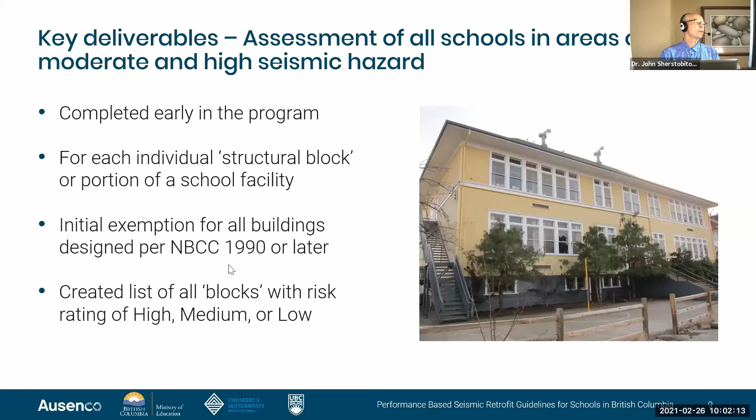Another key deliverable at the beginning of the program was to assess every school in British Columbia in moderate and high seismic hazard regions. Every piece of the school was broken into structural blocks because schools here in BC have been added on year after year, and each one had a different structural behavior. Initially, all buildings designed 1990 or later were exempt because studies show they met minimum life safety. A list of all the structural blocks in BC was created with a risk rating: high, medium, or low.

Another key deliverable of the program was a custom database. Every school district, every school, every block had all the studies that were developed for them, and this was available to all the engineers to use, to look at what was done in other school districts, other buildings, what had been done in the past. It was a great database for the ministry just to record where the program was.

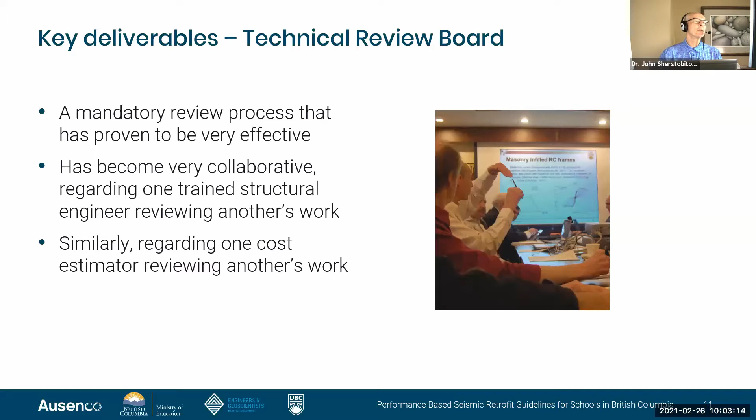Another key deliverable that was very successful was a technical review board. Every study was reviewed independently by another structural engineer. Every cost estimate was reviewed by another cost estimator, and it proved to be very collaborative. The engineers work, reviewing each other's work. It proved to be very collaborative to make sure the program was implemented as the Ministry of Education expected.

So the policy that the ministry put forth to the school districts: every high-risk building had to have this seismic project identification report done. What the ministry wanted and realized, there was a standard template. The fees for every consultant were uniform, so it was not about bidding low to get the work. Everybody had the same fees.

It was led by structural engineers, and at the end of the day, a concept and a cost was prepared for a standalone seismic upgrade, including input from the architectural, mechanical, and electrical disciplines to make sure all the removal and reinstatement of those components was included in the cost. And as I said, the technical review board reviewed the structural aspects and the cost aspects.

Following that, a project definition report was prepared to send to the ministry to obtain funding for the seismic mitigation of the school or replacement. At this level, this report looked at the options for an individual school: is it more cost effective to replace it, do a standalone seismic upgrade, or some combination of these? This now included all the costs for phasing, accommodation, moving costs, and maybe requirements from the local authority having jurisdiction such as sprinklers or universal accessibility. All of this was now the true, complete project cost for the ministry to provide funding to the district to implement this project.

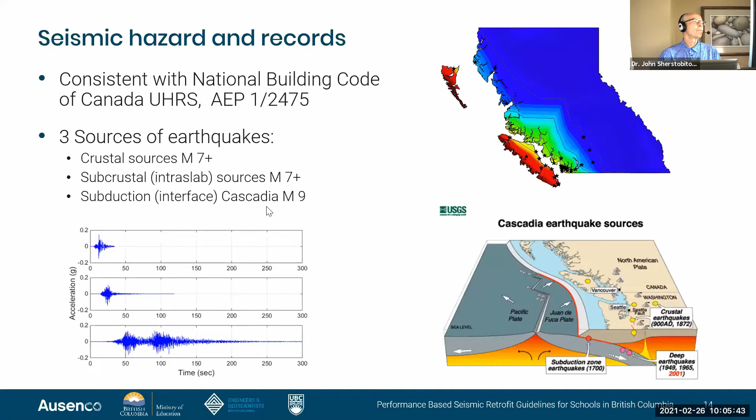So here's how the analysis was done. For each of the 3 earthquake sources, 20 ground motion records were selected, scaled to both high and moderate seismicity levels, and scaled to a conditional mean spectra at either 1 second or 0.5 seconds. At the end of the day, for each prototype selected for the studies, 240 ground motion records were analyzed to assess the behavior of each prototype in the system.

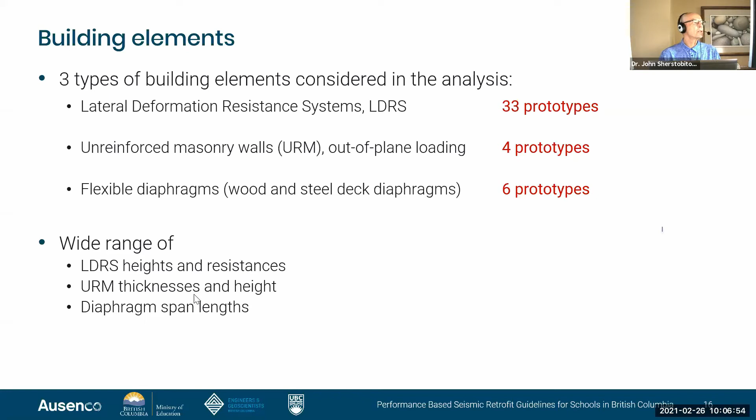The prototypes included lateral deformation resistance systems such as shear walls and bracing, with 33 unique prototypes consistent with existing and new construction in BC. This included unreinforced masonry walls that could collapse out of plane, flexible diaphragms of wood and steel deck typical for what we use here, and a wide range of heights, resistances, and URM thicknesses assessed as part of these analyses.

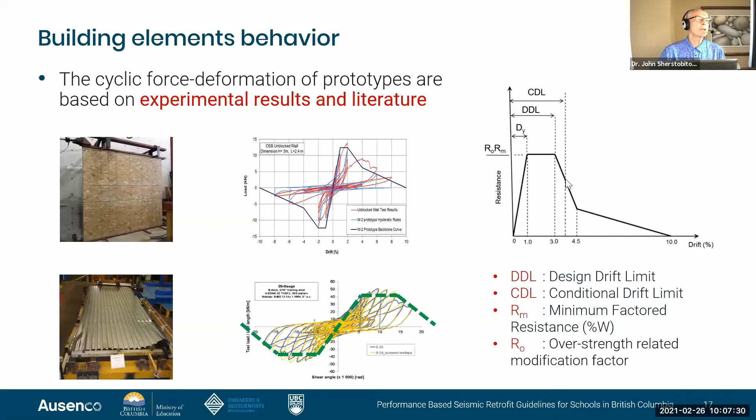For each prototype, such as the lateral deformation system prototypes or diaphragms, backbone curves were developed either from experimental data or from literature, including the strength degradation of each prototype. At the end of the day, a design drift limit was specified to achieve life safety, and a conditional drift limit was set to achieve collapse prevention for each of these components. This is just a snapshot of the variety of wood, steel, concrete, masonry, and clay brick prototypes assessed in the program, and the kind of maximum drifts allowed in the study for life safety performance.

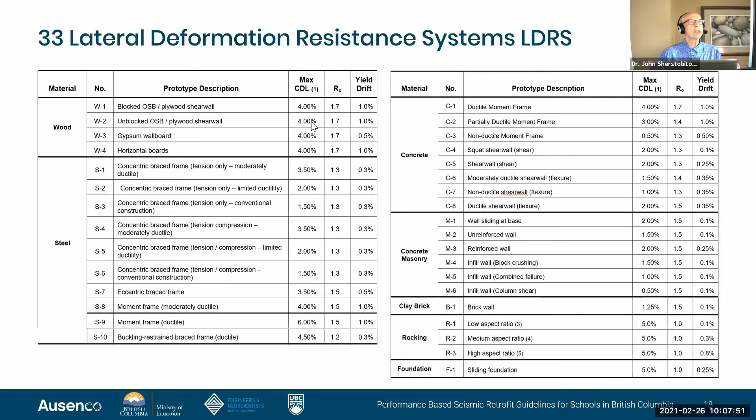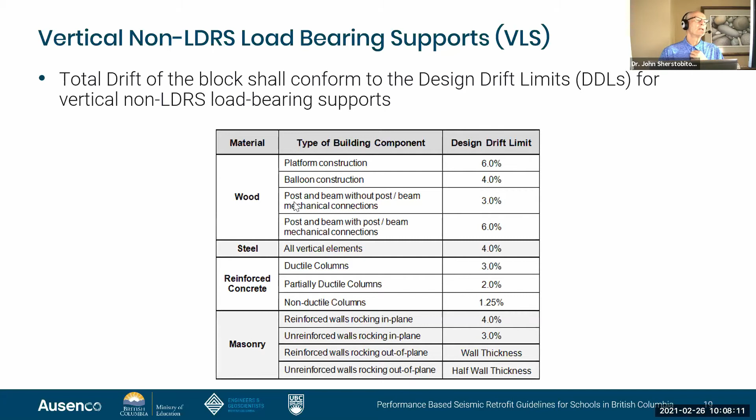Of course, the key in every seismic upgrade is to make sure that the vertical load carrying components remain able to carry the vertical loads. These are the drift limits for the various types of components to ensure they could carry the vertical load in the event of an earthquake.

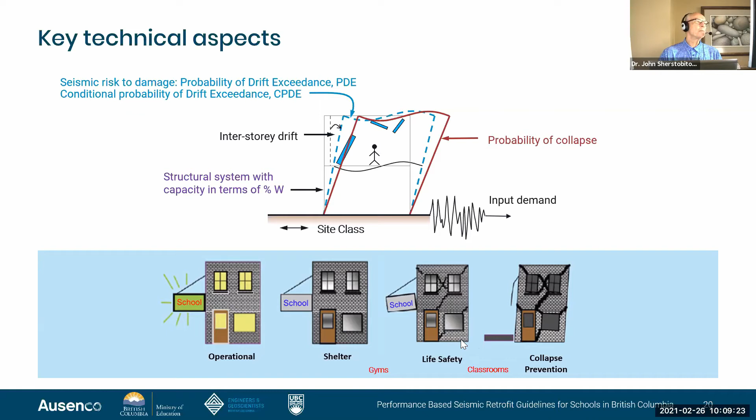For gyms, we expected a better performance to enable shelter in place after the 1 in 2475 earthquake, while classrooms generally required a minimum of life safety. For all the buildings assessed, this probability of drift exceedance of 2% in 50 years was deemed low risk, with various categories of medium and high risk also defined. The program right now is upgrading everything estimated as high risk to bring it down to low risk.

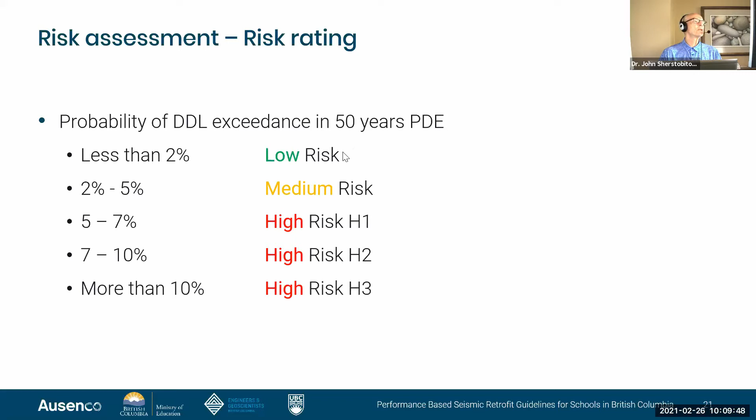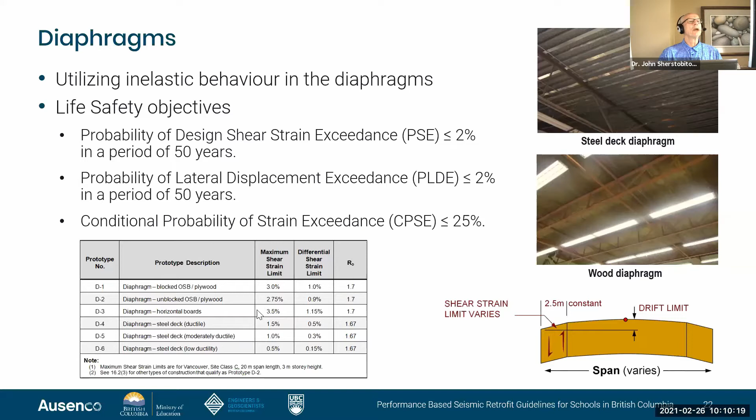Similarly to the lateral deformation system, the diaphragms were all analyzed for inelastic behavior to get the maximum capacity out of this inelastic behavior, again looking at probabilities of strain exceedance or displacement, either a probability or a conditional probability. The various diaphragms assessed are shown below here, covering all those analyses I mentioned.

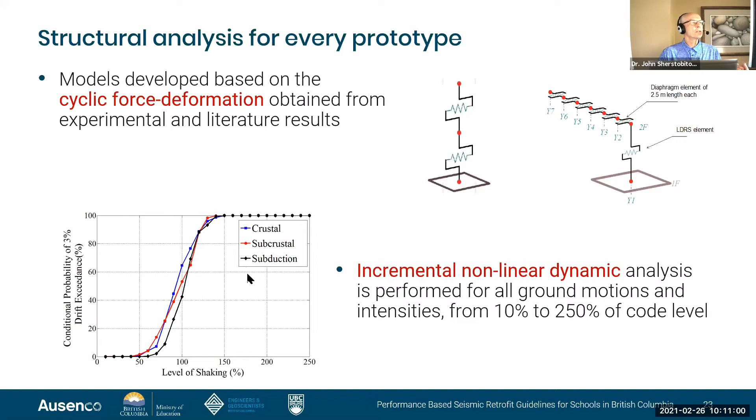So what did this analysis entail? Those nonlinear backbone curves, the nonlinear degradation performance of all the prototypes previously mentioned, were analyzed both as lateral deformation systems and as diaphragms. Incremental nonlinear dynamic analysis was performed from 10% to 250% of that code level earthquake to get these curves for each of the 3 types of earthquakes, moving into the probabilistic combination, ultimately to get a probability of drift exceedance in 50 years versus the factored resistance needed for that particular component. Everything was a probabilistic approach to be consistent with the probabilistic approach of the National Building Code.

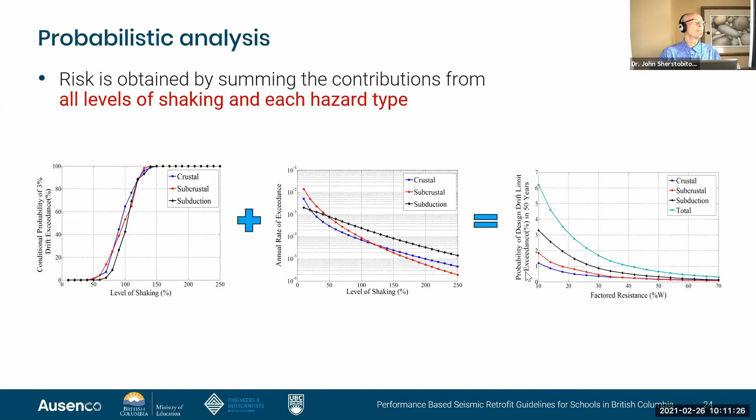As I mentioned, the fundamental goal was a life safety performance objective: a probability of drift exceedance of 2%, meaning the probability that this drift over the 50-year lifespan of the building would not be exceeded for all the kinds of earthquakes we can see in British Columbia.

In addition, there was a conditional probability check for just the 100% earthquake level: 60 earthquake records run for that level, with a probability of drift exceedance of 25% as the strength degraded. So a little further performance, but still far from collapse and collapse prevention.

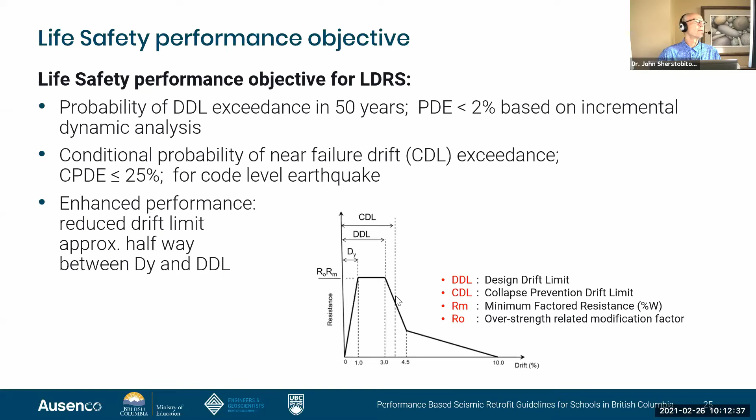So the seismic analyzer, I'll talk more about it. This was just a tool to access all these pre-analyzed nonlinear dynamic analyses. It's used to perform risk assessment and obtain retrofit resistance for drifts that would provide that life safety performance level. I'll speak more about this shortly.

One key aspect of this, we call it a toolbox approach, is that the intent is to use all the capacity of the existing components in the school and only add new components as necessary.

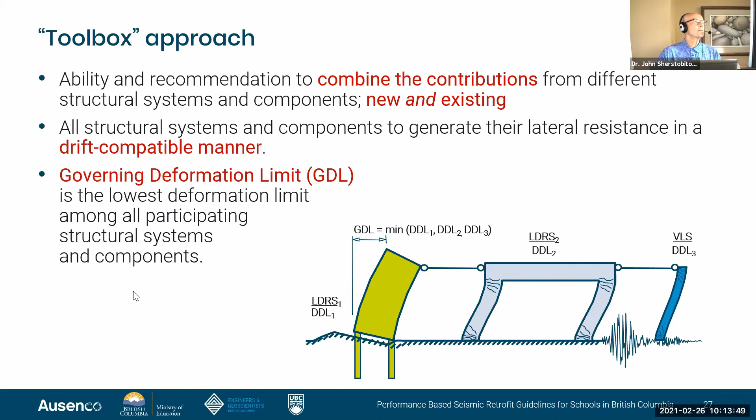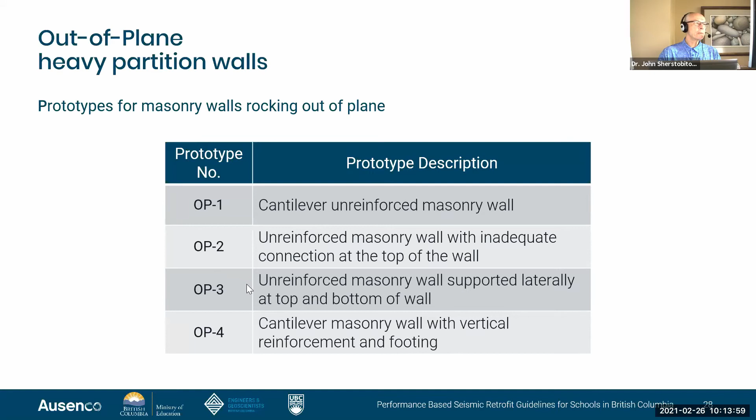Out-of-plane heavy partition walls—we have kilometers of these in our BC schools. There were 4 prototypes assessed. The most typical one is this prototype we called OP3, for out-of-plane rocking. As soon as the drift exceeded the thickness of the wall we get collapse, so we used that same probabilistic approach to ensure those had the 2% in 50-year performance of not exceeding that drift.

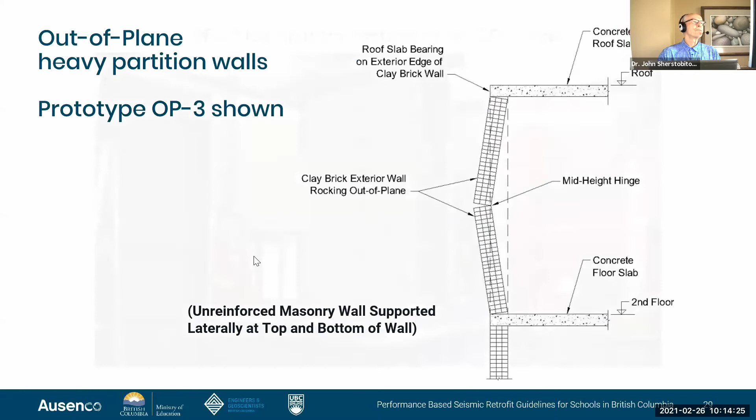There was a lot of testing done at the University of British Columbia on the shake table, again on masonry walls that we have miles of in BC.

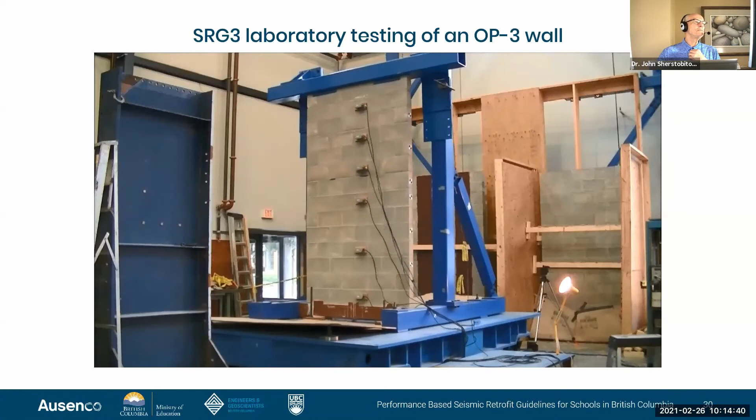And we assessed many simple retrofits, this one being unistrut on one side of the wall.

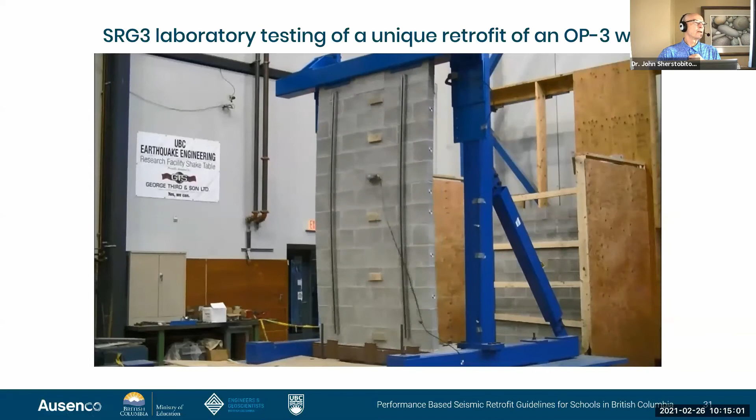The beauty of that testing is that we found very cost-effective solutions to implement on only one side of the wall to minimize disruption and interruption to the school program. Again, the one Chet showed was simple unistrut with masonry screws, not even connected to the floor above or below.

Another really important part of the program was a special study we did on liquefaction. We have many schools in liquefiable areas, and what we found is that predictions using some of the previous empirical equations were too conservative for what we deemed inland schools—schools more than 300 meters from the river or ocean with a non-liquefiable crust of 3 meters or larger—which behaved very differently than schools near the water's edge.

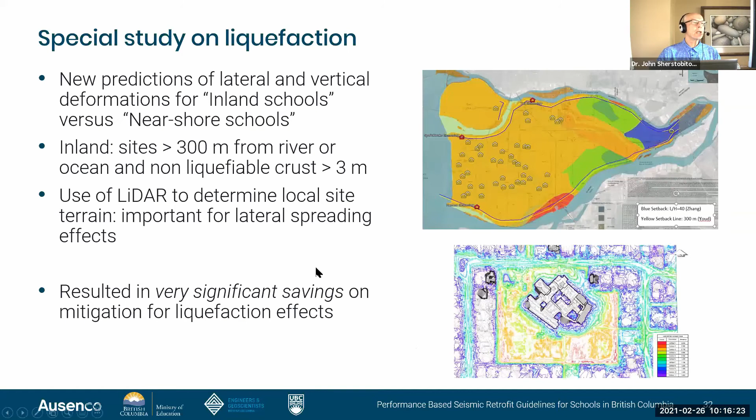So we used LIDAR to determine all the local terrain. We did analyses for a variety of schools and implemented simple guidelines that resulted in very significant savings for the mitigation of schools where liquefaction potential exists. This was an excellent study completed about 6 months ago.

So to the analyzer—this is a lookup tool for all those analyses, and it's very simple to use. You put in the community you're in, the site class of the school, and one of those prototypes that I showed you. For an assessment, the engineer has to determine the capacity, the resistance of that prototype, the story height, and the drift limit that's allowable to achieve life safety.

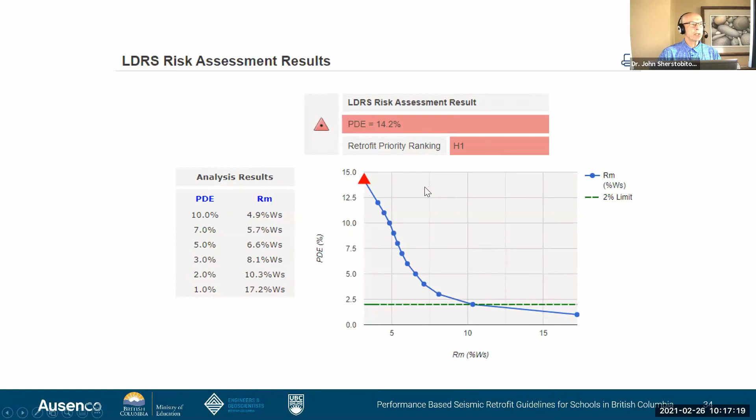You push the analysis button and it tells you whether you meet that probability of drift exceedance of 2% or not. This particular example shows no—it should be 2%, it's 14%, a high risk. Something needs to be done to upgrade this particular structural block in a school.

So then, for the same area, you select a prototype that is going to be used for upgrading. When you run the analysis, it tells you the lateral capacity as a percent Ws that's required to achieve that 2% in 50-year probability of drift exceedance for this drift to achieve life safety.

If you recall from the previous slide, this particular building had 4% existing capacity. It needs 13.6%. So the goal is you only add new structure with 9.6% capacity—combining the existing with the new in a cost-effective manner to achieve the performance that's expected.

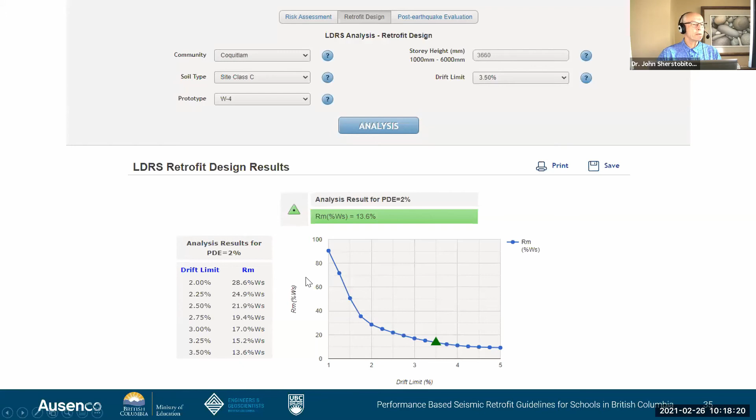So the intent of the analyzer is to look at all these options. Sorry about that.

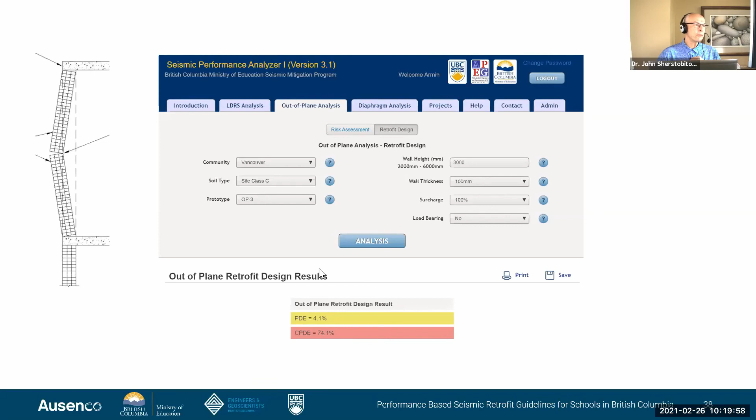This analyzer is also used for out-of-plane walls, again to achieve, is that PDE 2% or 25%? It allows the engineers to look at options of perhaps reducing the height and adding restraints to achieve the PDE and CPDE that's necessary.

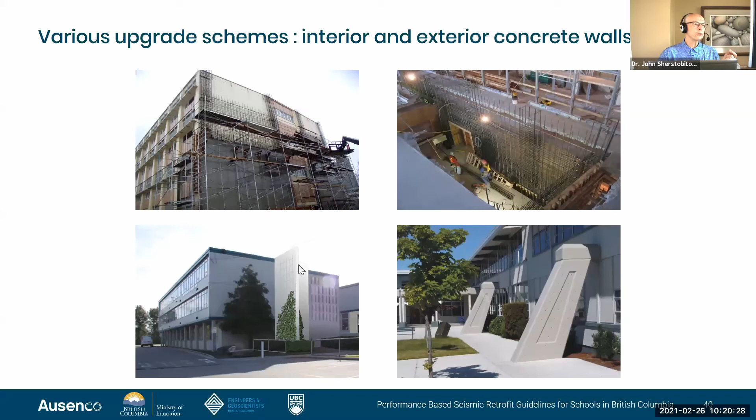These are just some shots of existing schemes that have been used: external wall upgrades, interior upgrades. We used a lot of exterior wall upgrades to minimize disruption to the school, and some external piers. Our heritage buildings were upgraded conventionally on the inside. We used base isolation for some heritage buildings, and extensive use of FRP within stairwells, etc., in buildings we found very cost effective.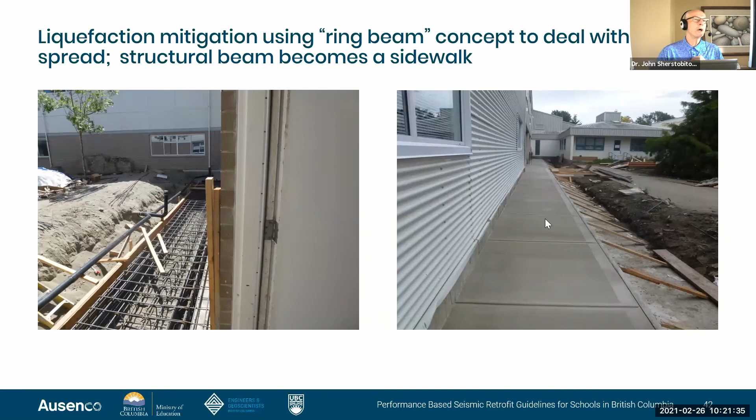The other thing we did was some full-scale testing to verify the retrofit capacity of these upgrades. Here's a two-story school building, just the first story put on the shake table with the weight above it. This was also done for post-earthquake inspection training. We would bring structural engineers to look at the post-earthquake inspection and make a decision whether they'd allow students and teachers to go back into the building after the shaking. This is the maximum credible earthquake for a particular site.

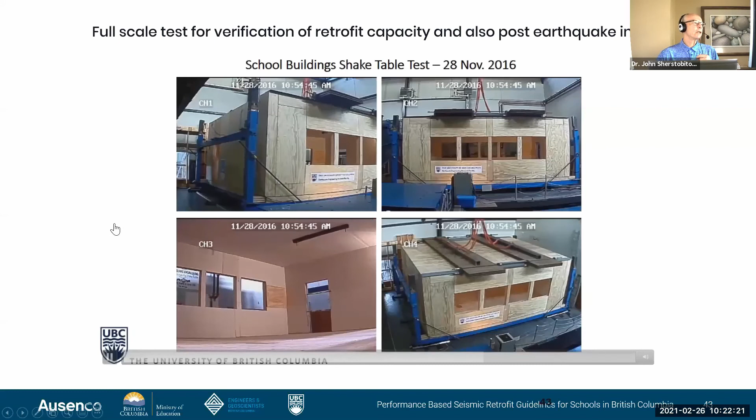So what's the status of the mitigation program today? 186 schools have been upgraded, and each one might have up to 10 or 15 structural blocks. A school consists of many, many structural components, so there might be approximately 2,000 buildings that have been upgraded. 29 are currently under construction, 13 in design, 19 with project definition reports, and the rest are in the program to be addressed.

$1.8 billion spent to date on the program. That's both seismic upgrading and, in cases where some of the very large secondary schools, it was deemed more cost effective to replace them completely with new schools.

What's the future going forward? The next edition of the retrofit guidelines is in progress, due in 2023, moving away from just the life safety or enhanced performance approach. A larger variety of earthquake intensities will be assessed, higher performance levels such as immediate occupancy will be addressed, and resilience targets for different levels of earthquakes will be implemented. In addition to just being applicable for schools, the intent is to make this applicable for every existing building in British Columbia.